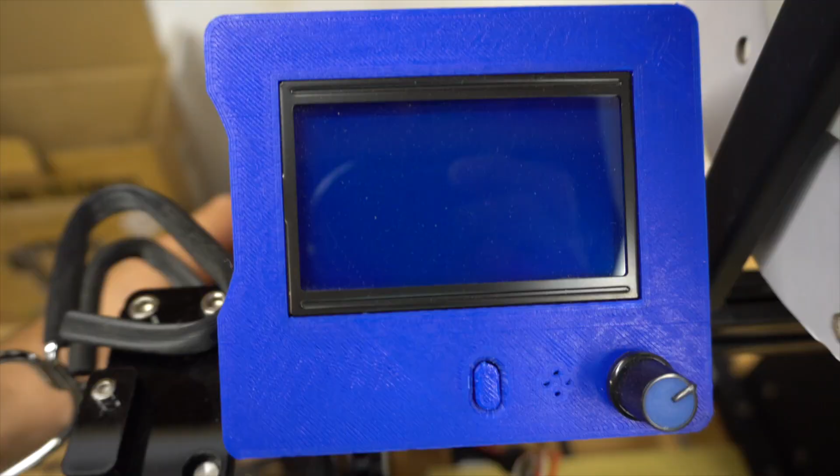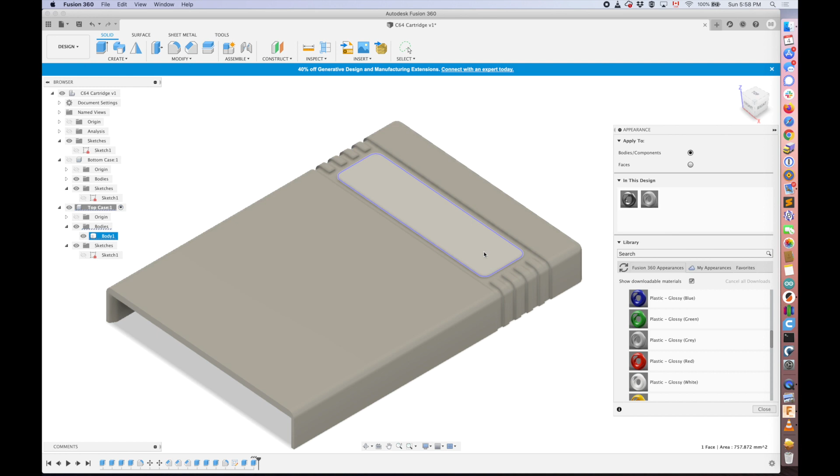Let's change the appearance just for the fun of it. So let's do plastic, glossy, gray. Let's do a gray here, and then a white on the... I think I can select this and then do a white on this, like this, and do the bottom case.

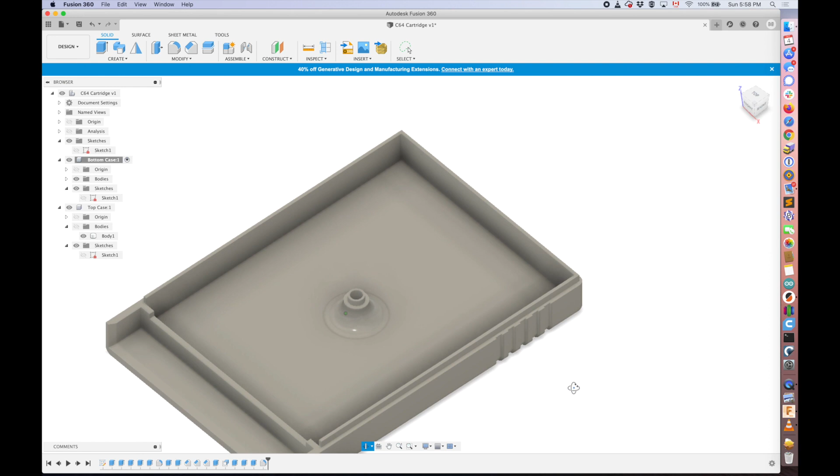Appearance. Select this one. Yeah, okay. Modify appearance or A. Take the same gray, put it in like this. That looks nicer. Let's look at everything. Yeah. Seems to be good.

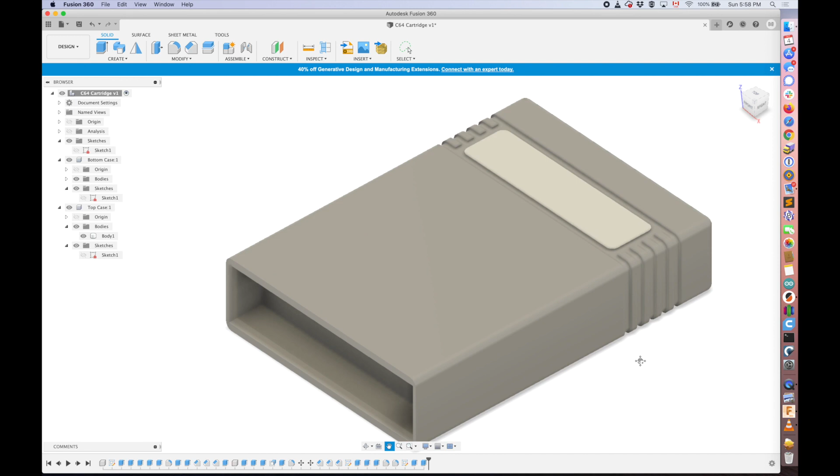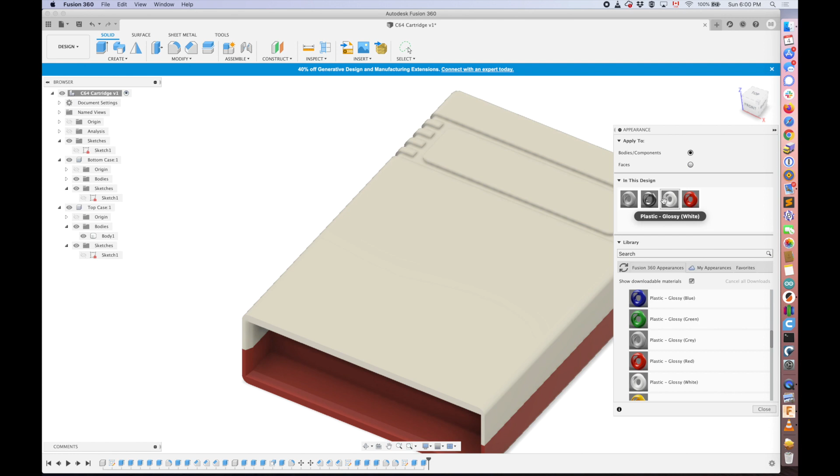Now the last thing to do is to print it, but just for the fun, let's do a 2-color, so appearance, and do say a red bottom and a white top. No, let's do a blue. Red and blue. That's it. Okay. Close.

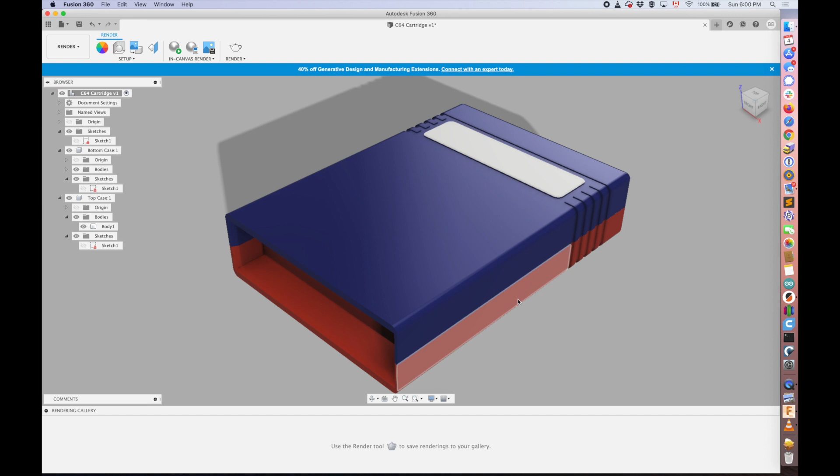Let's do a little render just to... Yeah, that looks nice. Yeah. Pretty satisfied with it. Cool. That's it. Let's save. Let's go back to the design and then save, because if you don't save, you are in trouble. And maybe you want to print this.

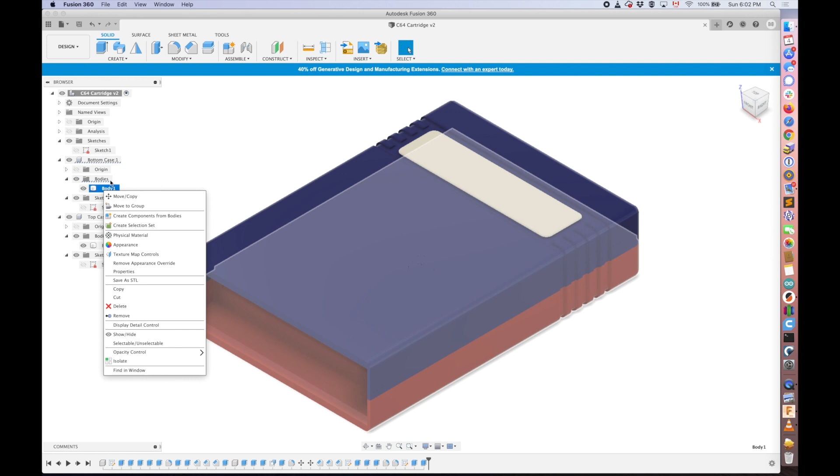So to print it, you just select one of the bodies. Let's say the bottom case body, and you save as STL. I like high and binary, so okay. And let's put it on the desktop. So let's call it C64 bottom case.

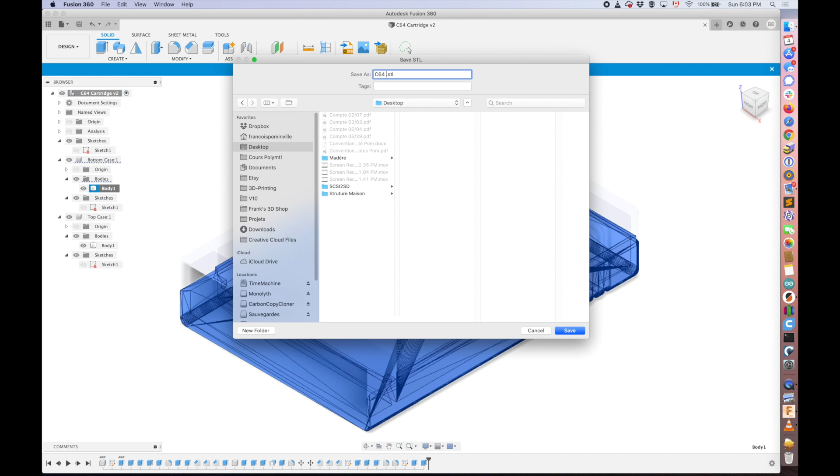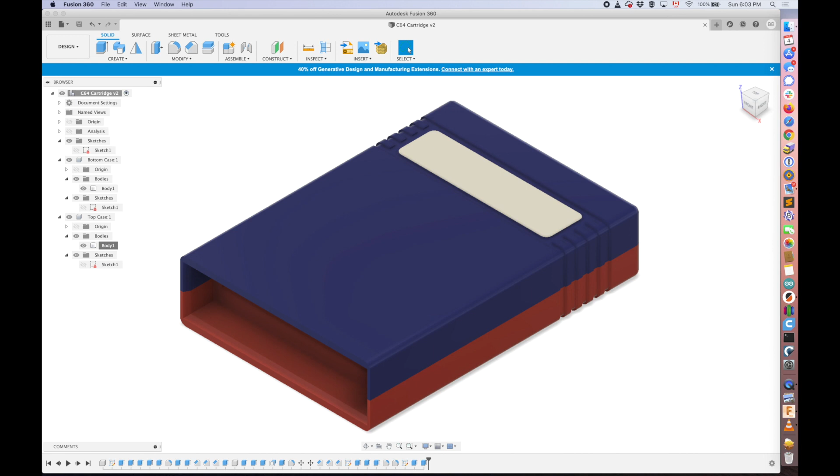Same thing with the top. Save as STL. Same settings. Okay. And let's call it C64 top case. And let's look at, let's say, PrusaSlicer. Let's load it from the desktop. Bottom case. That's it. Nice. And then if I load the top case, it's gonna be upside down.

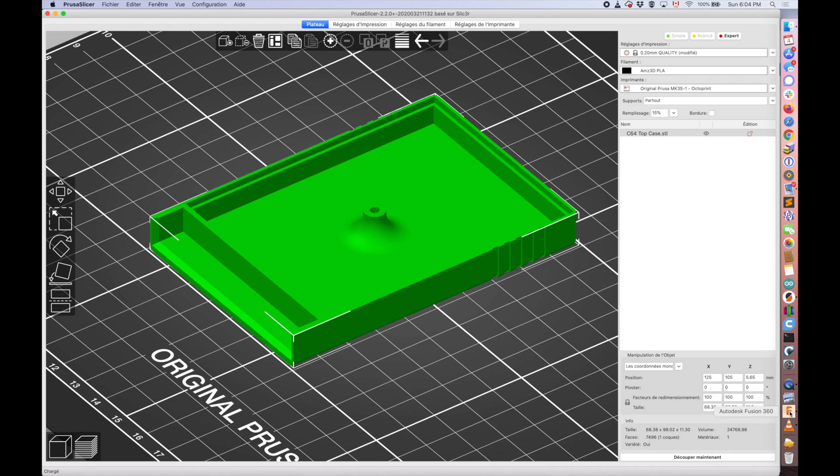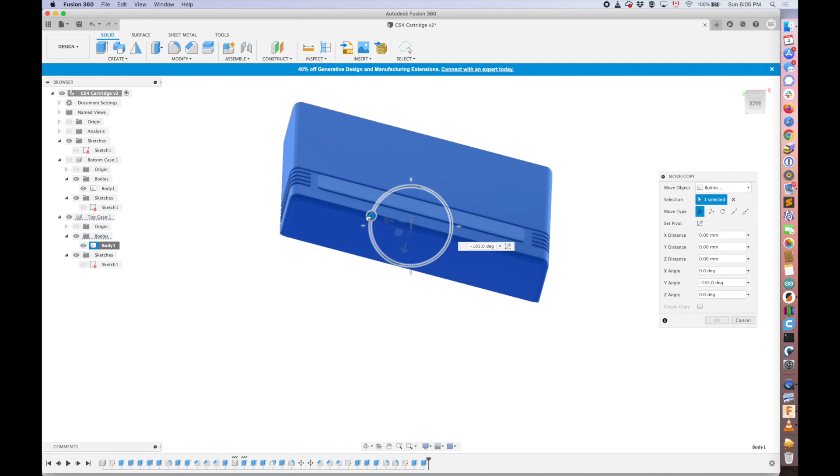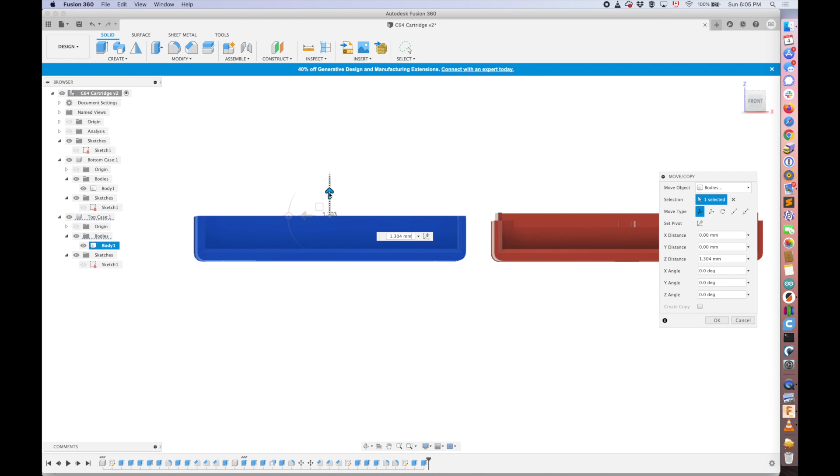So just for the fun of it, let's do something. Let's take the top. Let's move the top. Let's move it from the middle here. So let's flip it. Oh, sorry. Unselect this. Let's flip it. Then let's look at the correct orientation. Then let's move it to the side of the other one, and the same height, which would be I think 1.7, 1.2. That's about it.

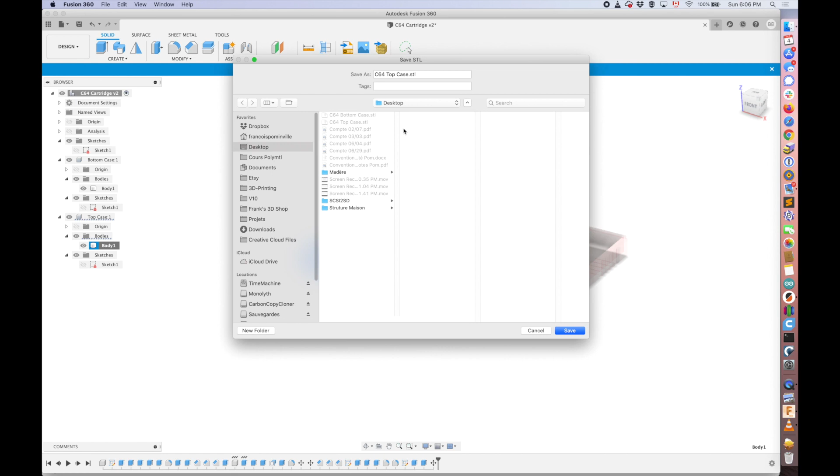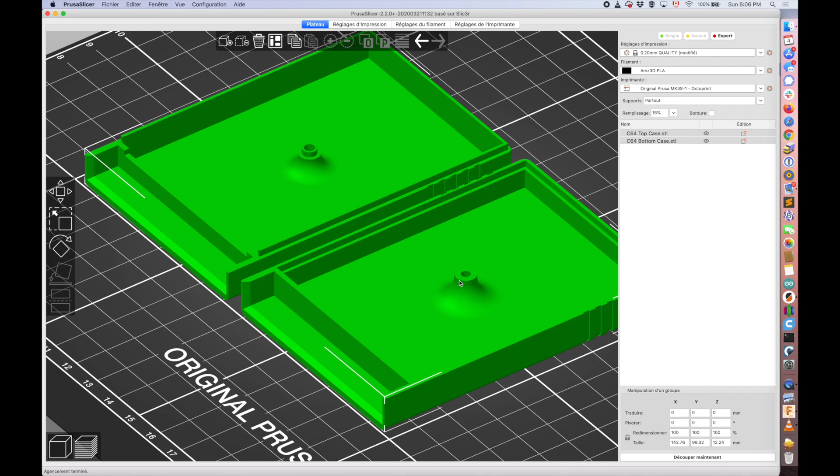So that way, if you do the top case again and save as STL, okay, then same name, replace, and you go into your slicer and you import the top case. It's in the correct orientation, same as the bottom case. So we have the bottom case and the top case. You can print them side by side, right? Like this. They look correct. If we do a slice, there is no error.

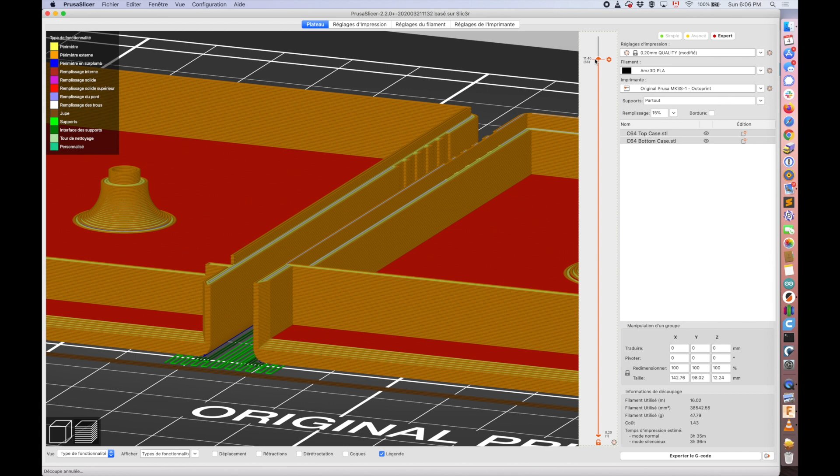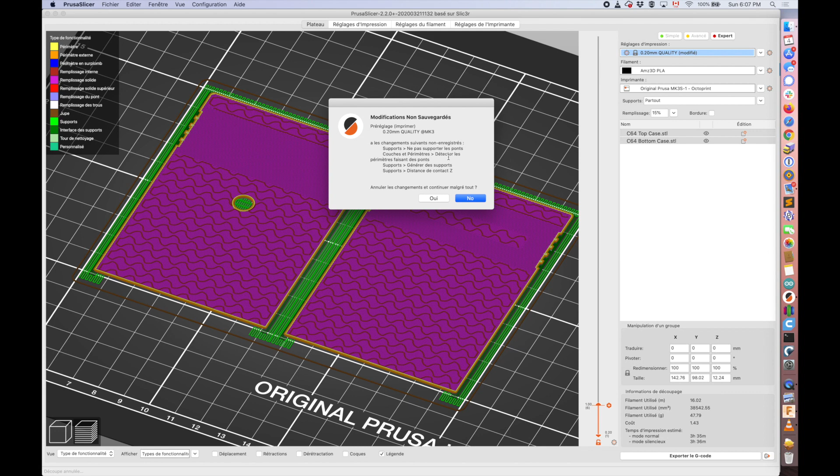And I like to look at the layers mainly like this. Everything is going to print correctly. There is support here. Let's remove the support. Let's load back the preset without the support. So there is no support here, if you see that hole.

But since we made a small 0.1 millimeter layer, oh no, it doesn't do that. Maybe I have to go back to 0.1 millimeter. Let's see. Yeah, because it's 0.1, you have to use a layer height of 0.1 to have it. So you see it here. Yeah, that's okay. But if you do it at 0.2, you lose that. Depends on what height it is.

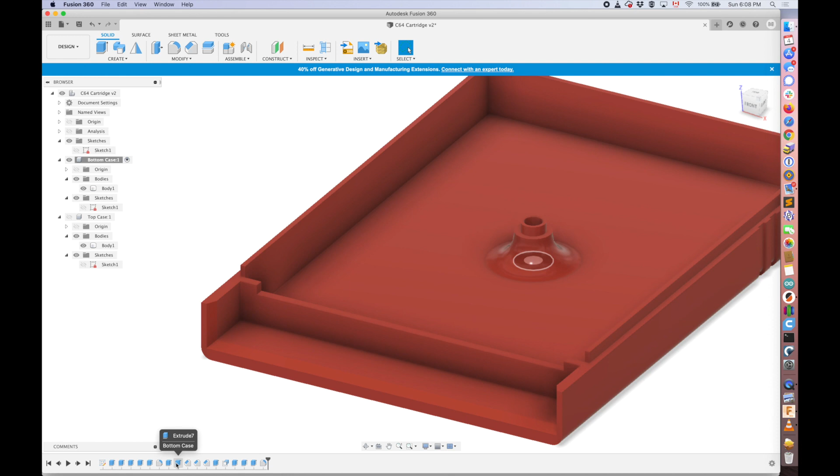But we could go back to, say, the bottom case, then go back where we did that small... I think it's here that we did it. Let's double click, yeah, and make it 0.2. So now we have, let's look at the analysis. We have a 0.2 millimeter sized, let's say, a shelf.

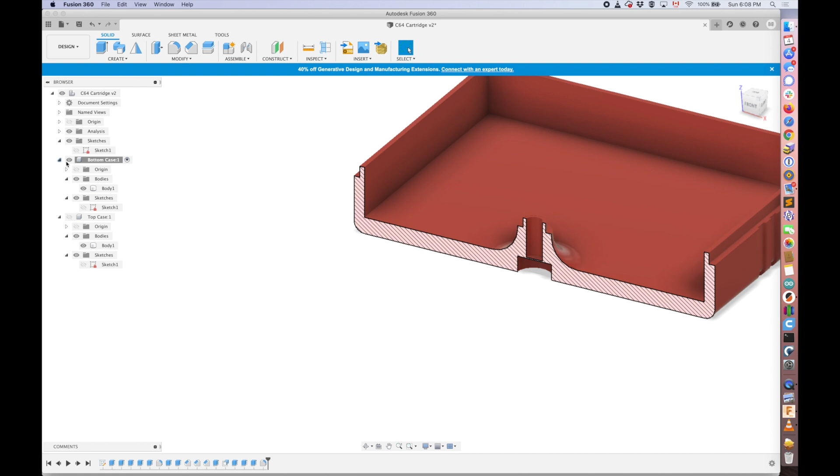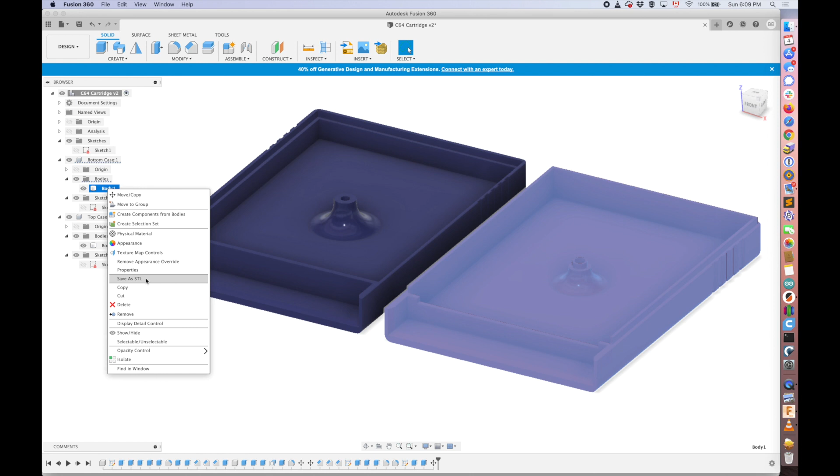Now, if I go back here, then re-export the bottom case. So save as STL. Okay. Bottom case. Save. Replace. And go back here and do a reload. No, it's in French, but anyway. So now we have reloaded that case.

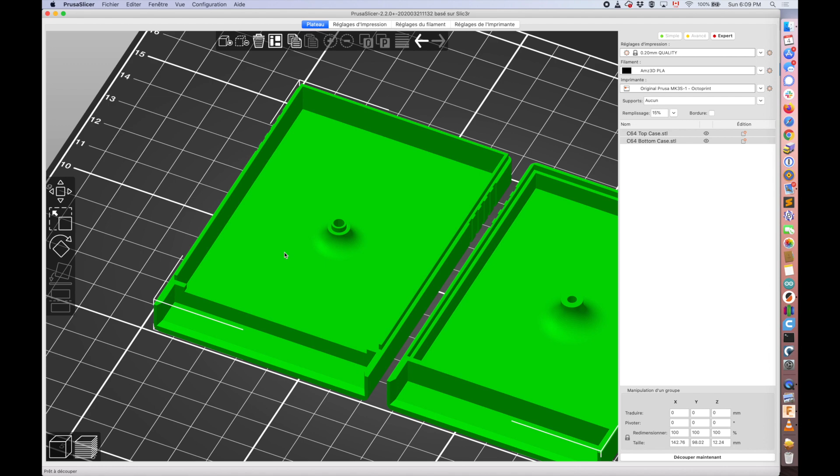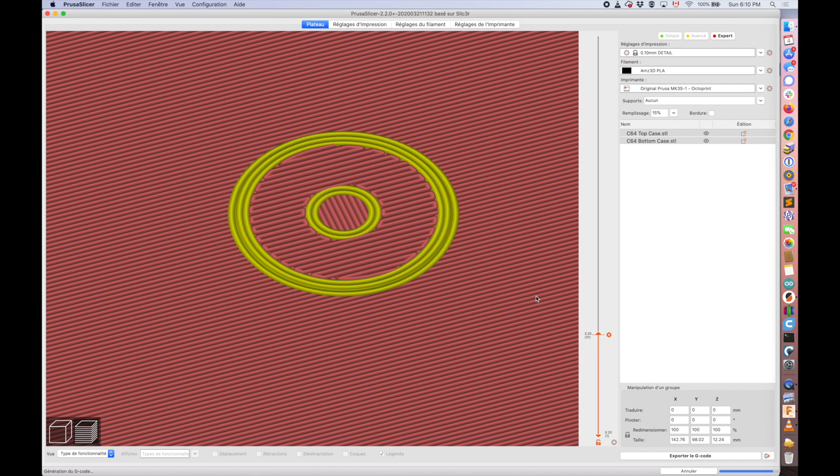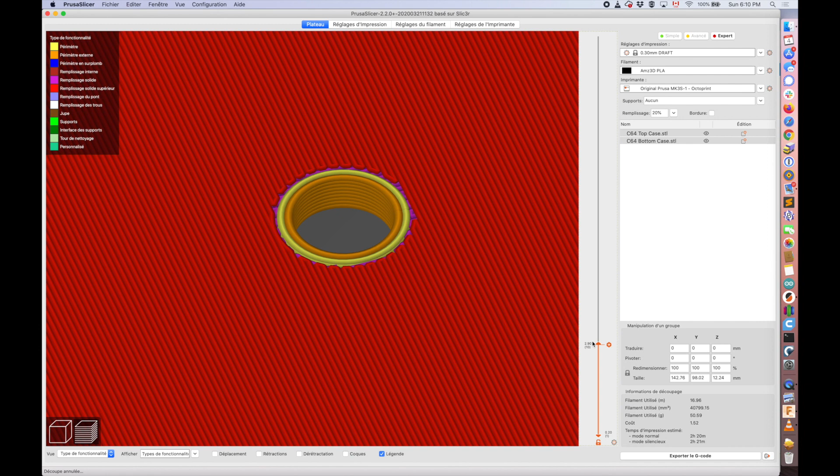If we do it again at 0.2, now we have the closed... yeah, that layer prints at 0.2 because it's 0.2, but it should also print at 0.1. Yes, same thing, just a little lower. And I don't know if it's gonna do it at 0.3, not sure. Let's try. Yeah, but at 0.3, this top one is messed up. So let's look again at 0.2. Is it correct? Will it print okay here? Yeah, it's correct here. So 0.1 or 0.2.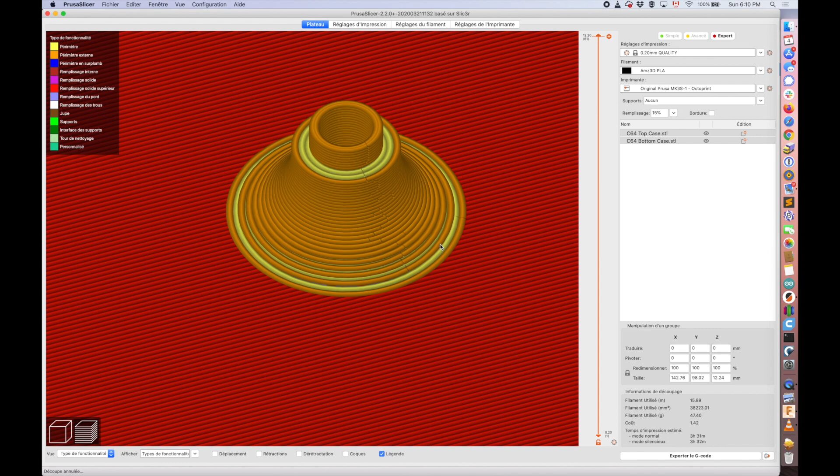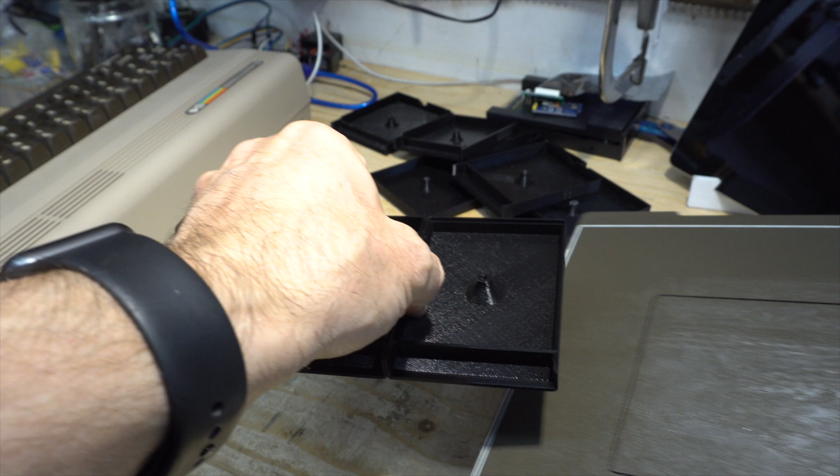Cool. So let's take a look at what we have redesigned. I already did it once in Fusion 360 for this one. This is the one we did together inside. Oh, that is satisfying when it pops like that. So let's see if we made some mistake or if it fits like the other one.

I didn't put the hole, so let's remove this and try it like that. Probably yours will not have a switch, so... oops, I did something wrong in the measurements. What did I do? I think I took the whole thing here, so it's longer by that much. So let's correct this and print it again. And maybe add the hole just to see, but let's see if at least it's closing.

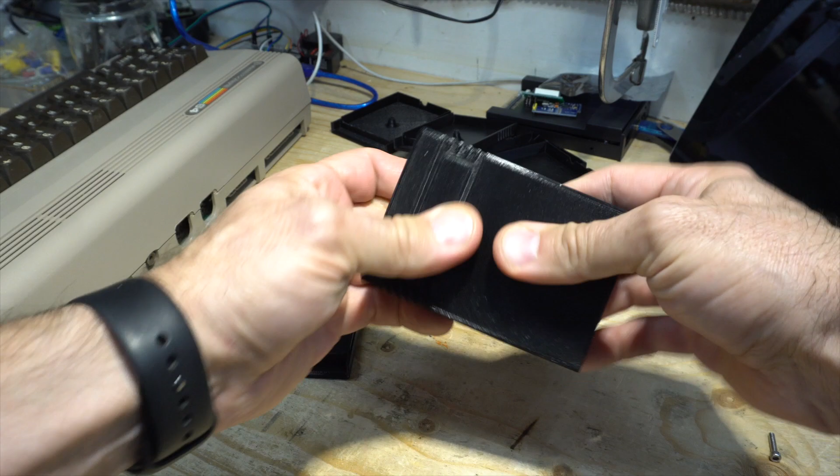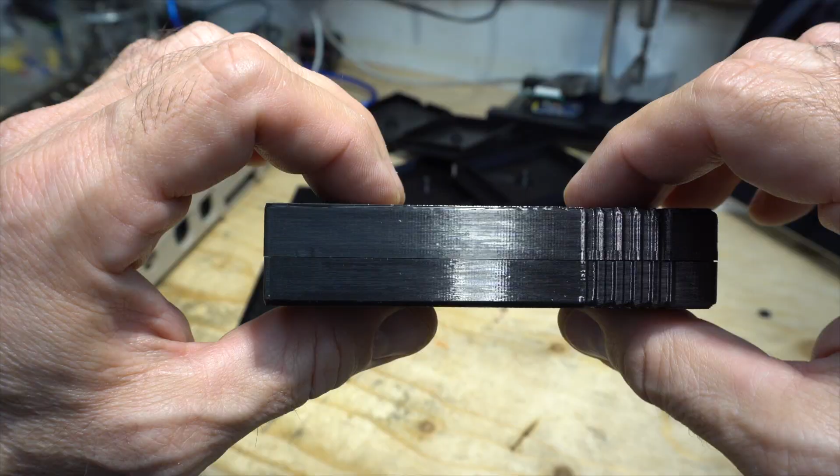Yes, yes it is, but it seems to open up here. So it's a little too high here, I think this is too high for this. It shouldn't touch. Yeah, it's touching. So I'm gonna remove, say, 0.4 from the top here, and we are going to scale down the inside so that it fits, because this is not the correct measurements.

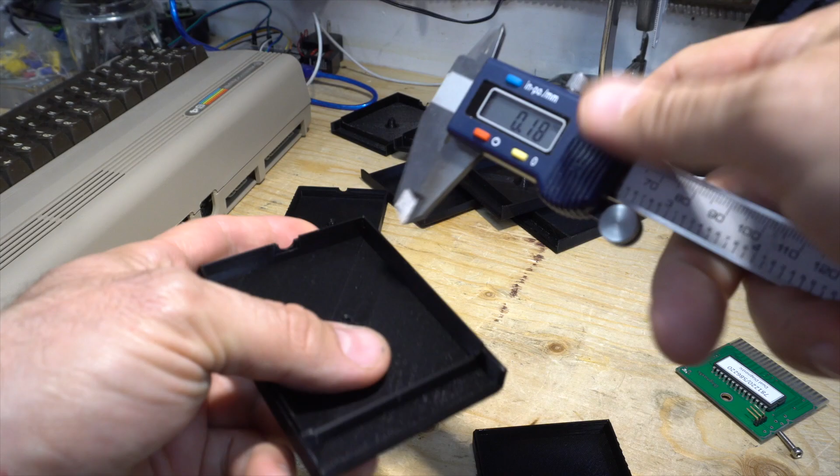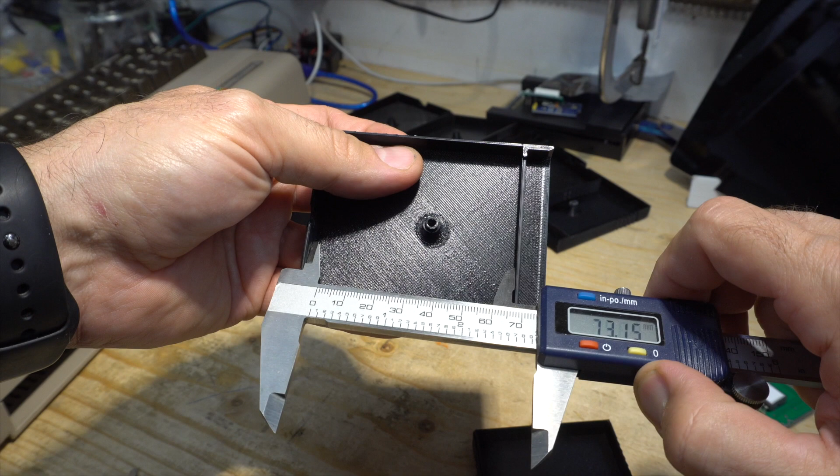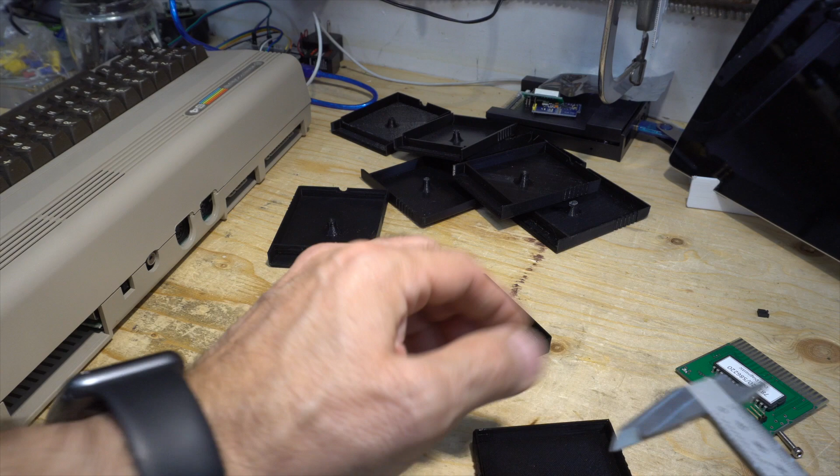It should be, let's see, I'm at 0, and let's see, so 74.74, say 74.74 inside here. So let's go correct this and print again. That's why we print something. It's easier. You just have to modify the problem and try again. So let's go back to the computer.

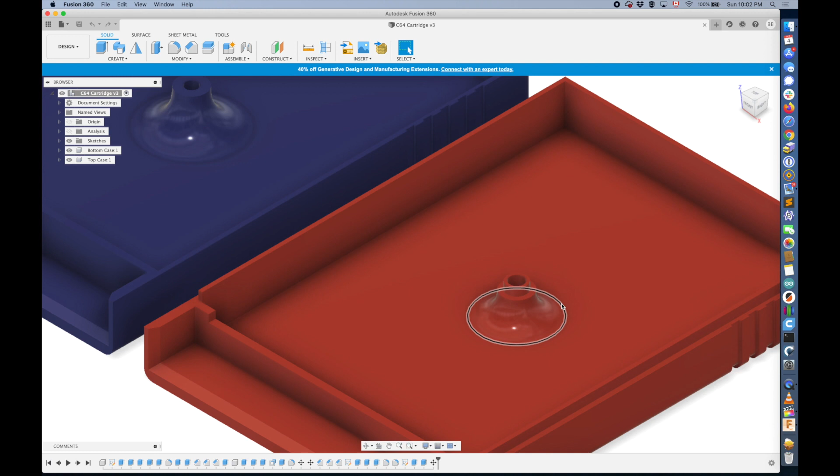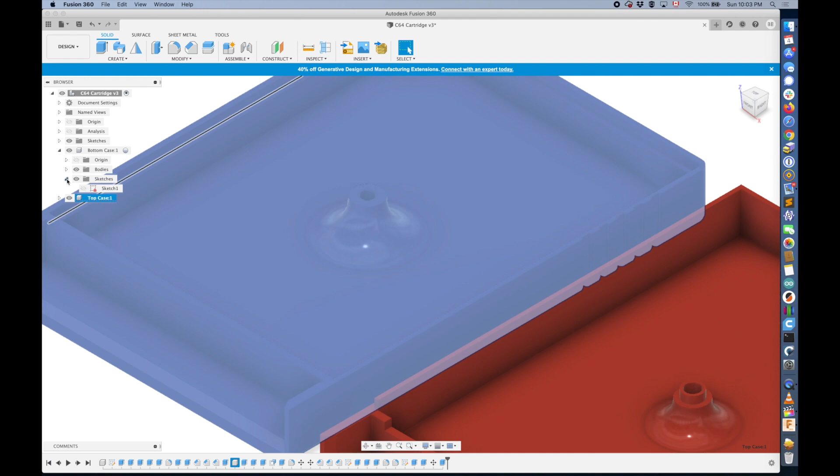Okay, so we are back where we stopped, and let's modify the height of this. To make things easier, let's move this up. Because it's upside down, we move down, say 0.4 millimeter. Okay, then the first sketch, and now if everything was correctly done, we should be able to edit the sketch and keep everything else correct without needing any other modifications. So it was 74, that's 74, or just about.

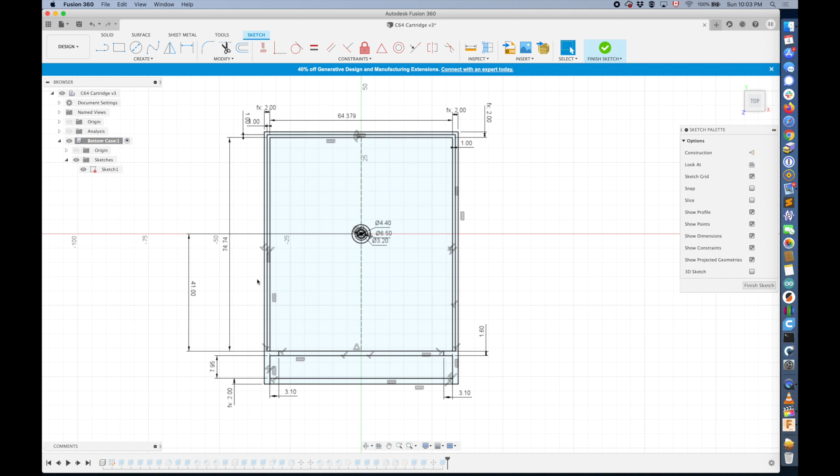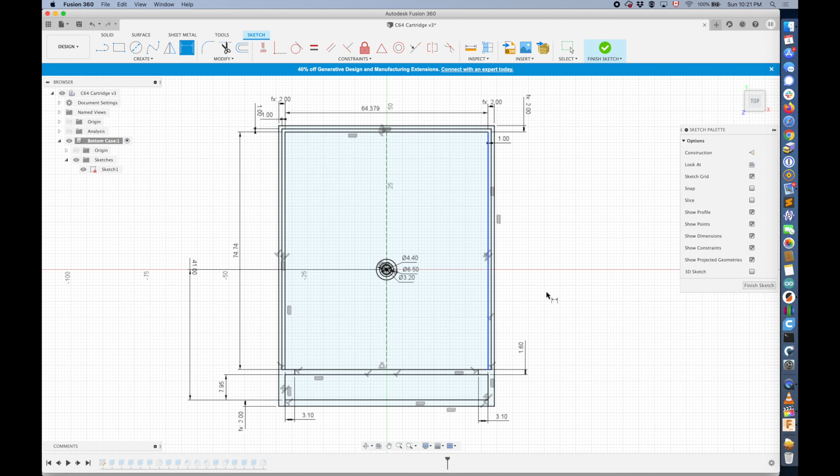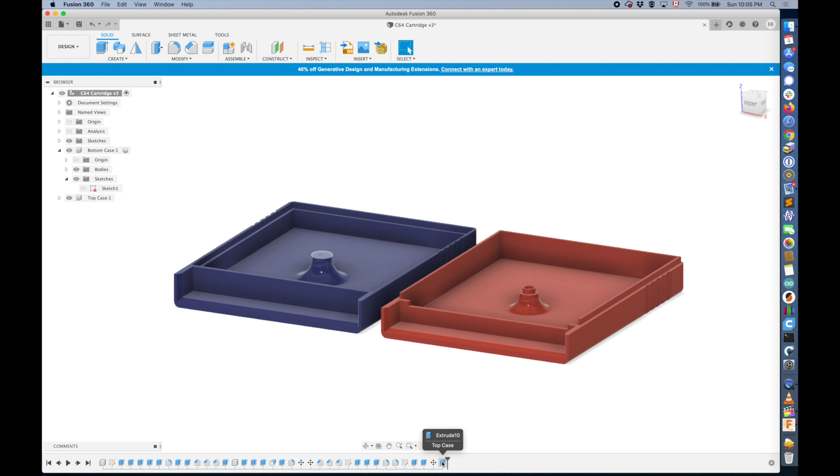But I think that this measurement isn't good either, because it's from here to here. That has to be 41. That's 41 from the hole. So I think that is more like what we need. And you see, everything stayed the same, because everything was dimensioned and constrained, so you don't have to modify anything else. It's just the dimension and the position of the hole, and we have reduced the height of this one too. Yeah, it's here. So let's try this again.

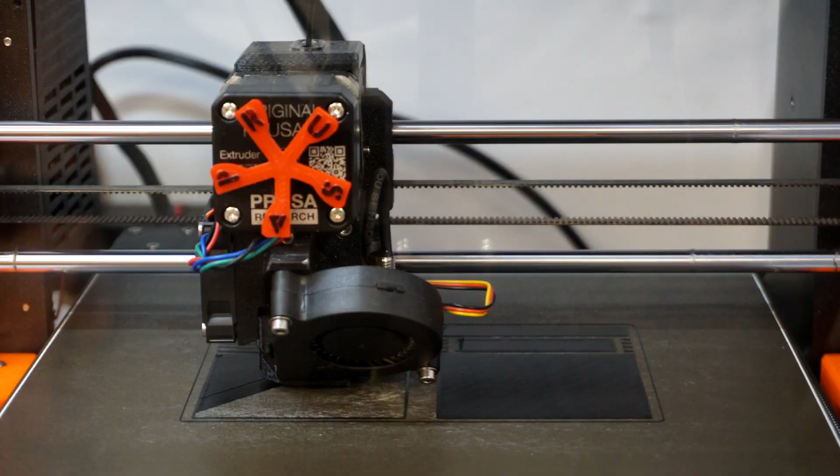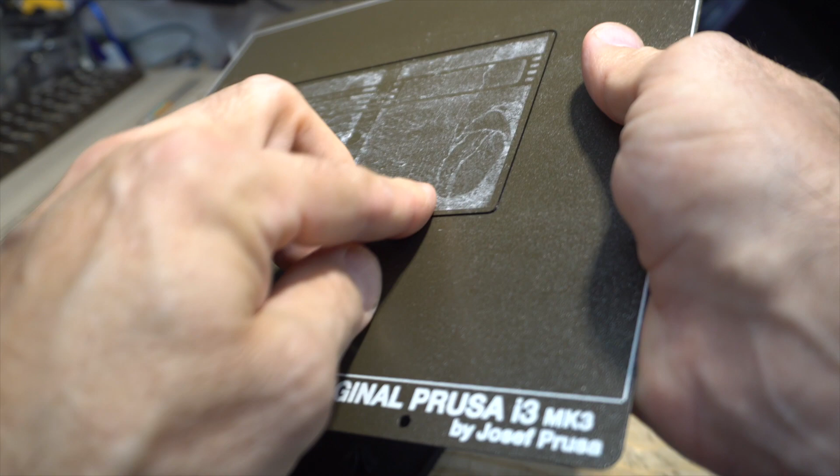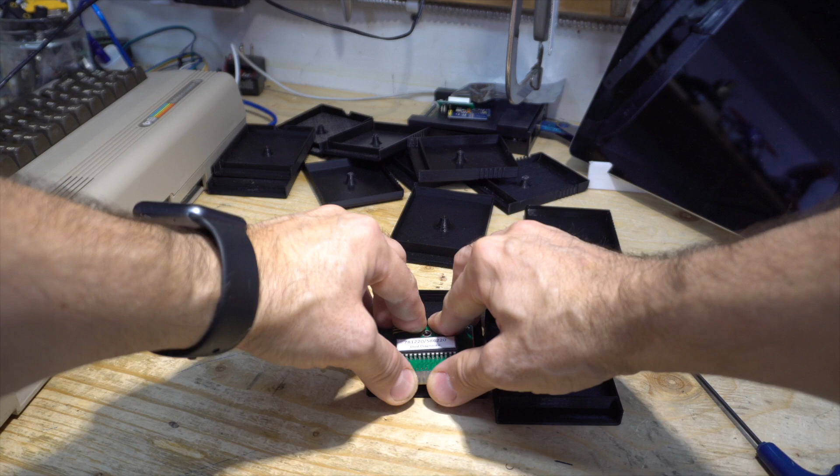So let's send it to the printer. That's it. Okay, those were too big, so let's bring the new ones. Still satisfying. Move this away. Let's see. Yes, we did make changes. Then put the cartridge in. Like that. Still no holes, but we'll do this later. And yeah, fits nicely now.

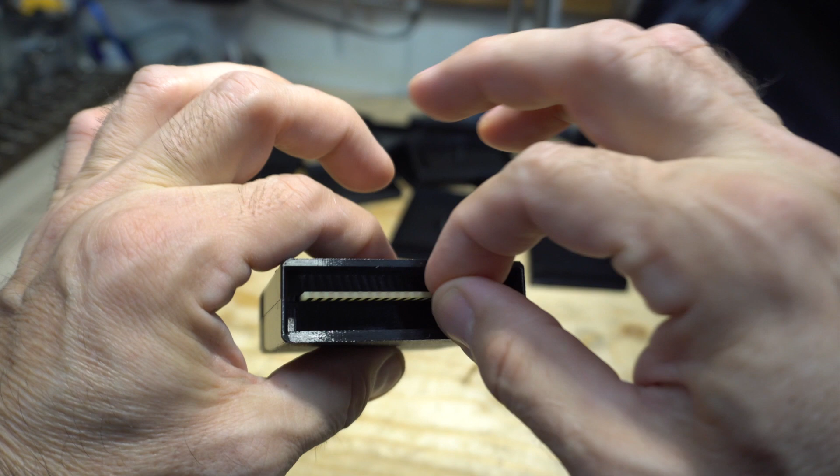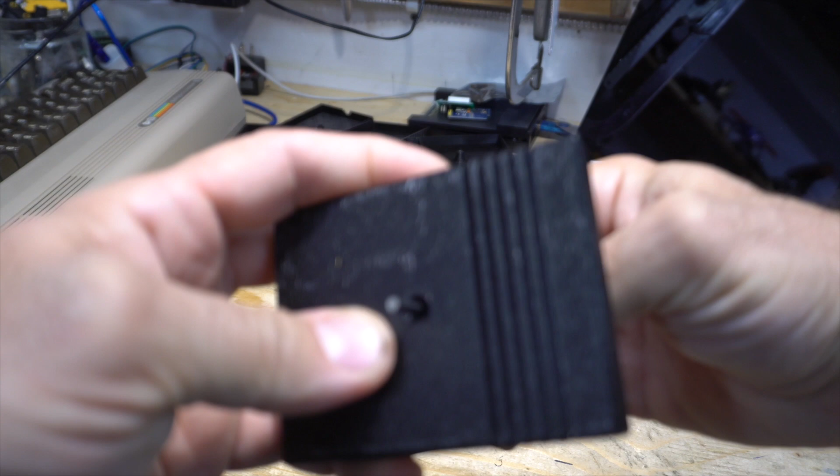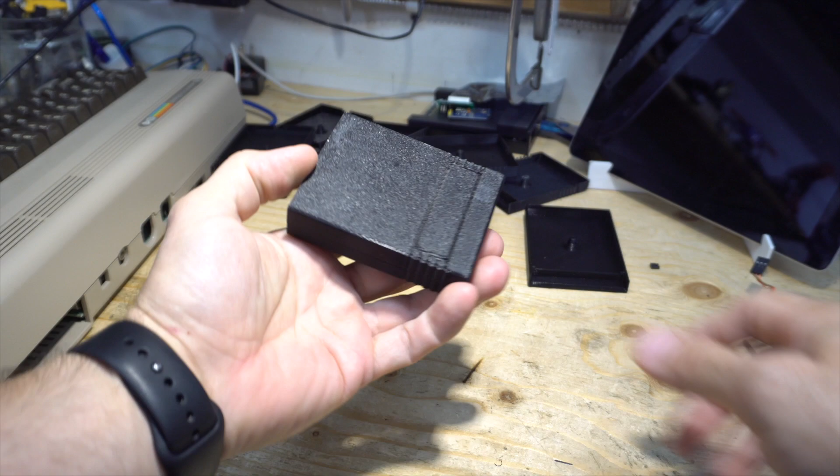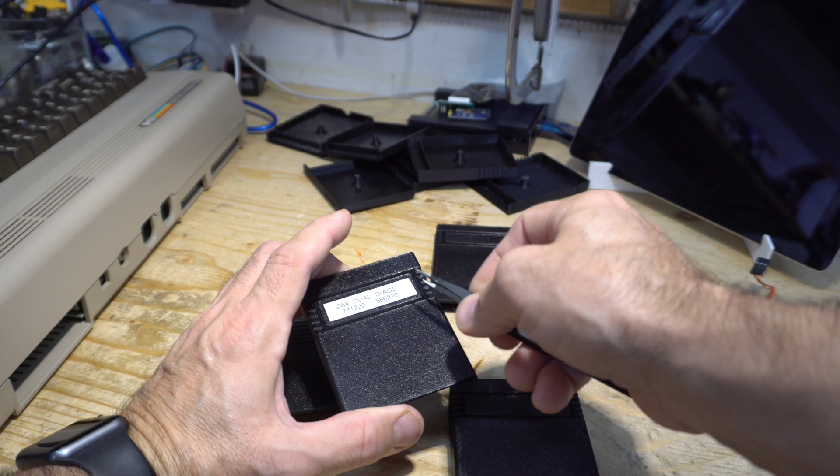There is no gap, and everything is fine. Oh, there is the small bridge. So we pierce a small bridge inside and use it. I think it's a 14mm screw. That's it. Then maybe transfer this sticker to the new one. That's it. And then final test. Yeah, works great.

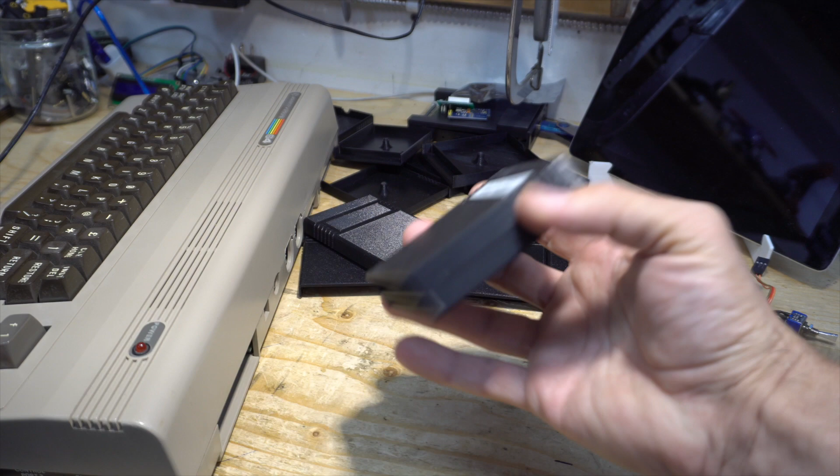So the design works. We did correct some errors. That is what is great for rapid prototyping, because you can easily print something and a couple hours later make changes, print it again until it's just right the way you want it. And this is perfect, except for the hole. I'm gonna add the hole. Cool.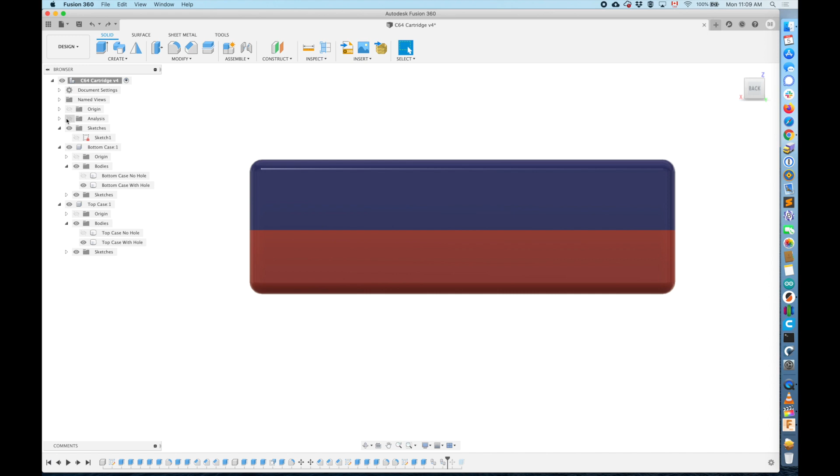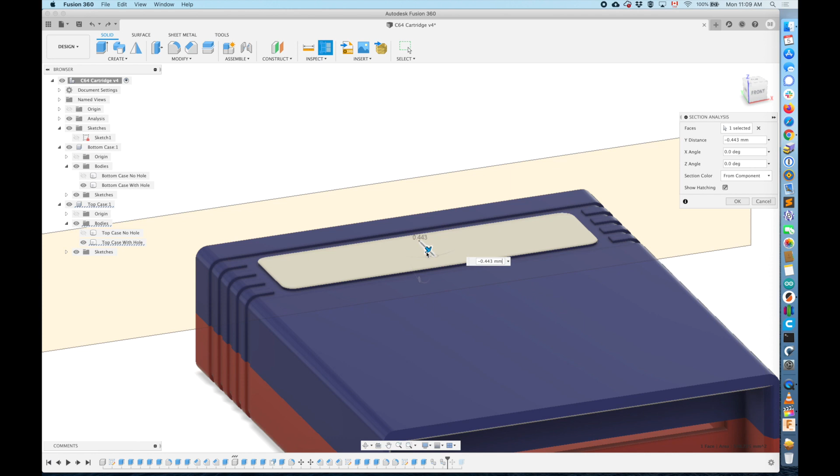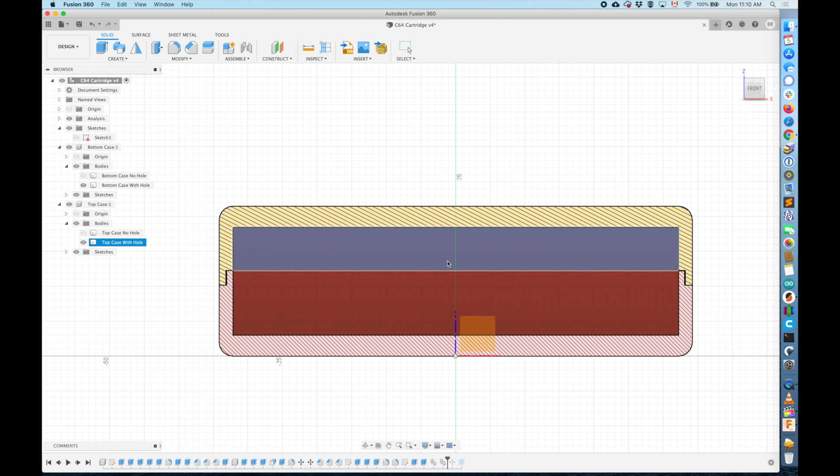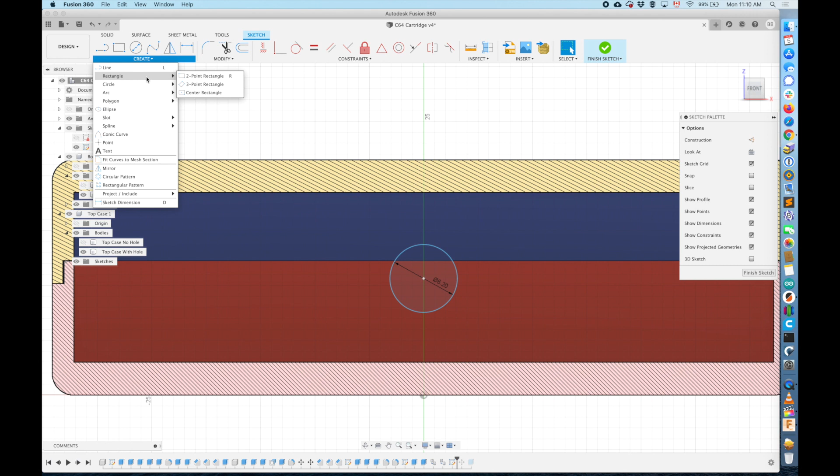Okay, so let's do a section analysis so that we can see inside, but just the other way, like this, so that I can do a sketch from the inside. And now let's create a new sketch on this plane. Let's place it about in the middle. It's not that important. So 6.3mm. And my switch has a square that I can use so that it doesn't move when we screw in the switch. So I'm gonna create a center rectangle, so it's centered here. So 6.2 by 7.3. No, 9.3.

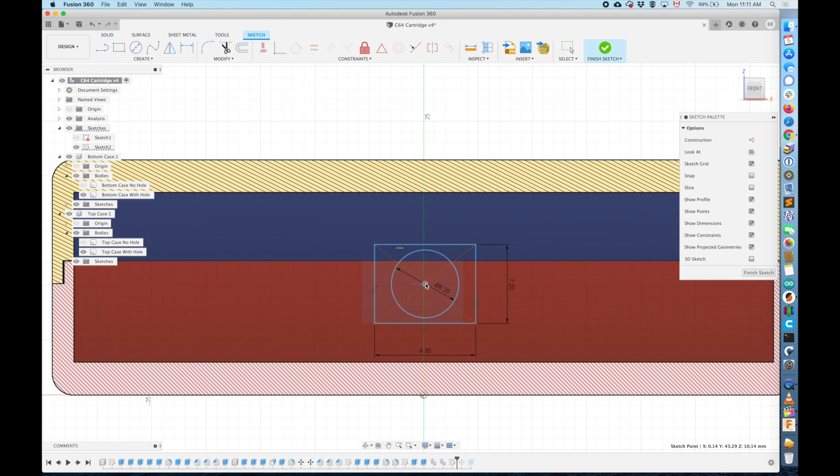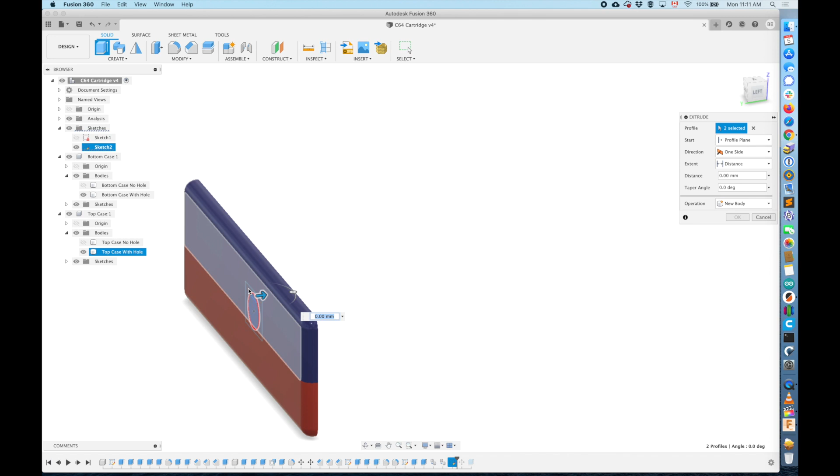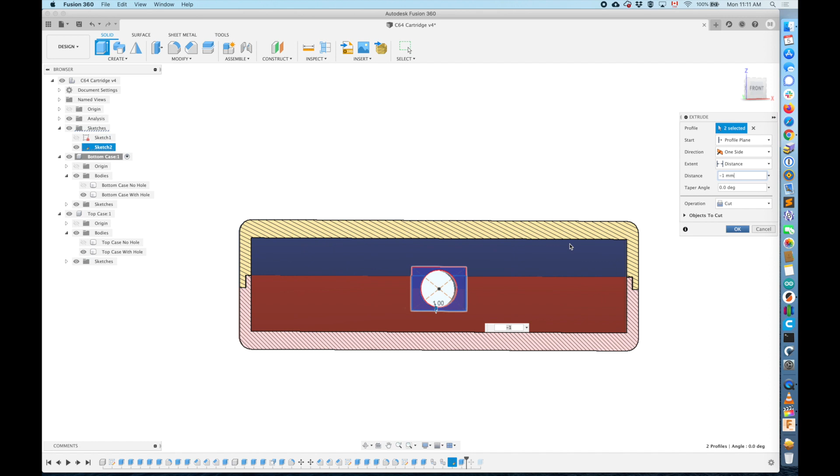7.2 by 9.3. Yep. Okay. Center this. That's what I want. So a hole for the switch and a recess also for the switch. Let's extrude the hole, this and this to the outside. This seems correct. Then extrude the notch by -1. Turn off this and see. Yeah, that's what I want, because when I screw in my switch, part of it will hold in this square so it doesn't move when you screw it in.

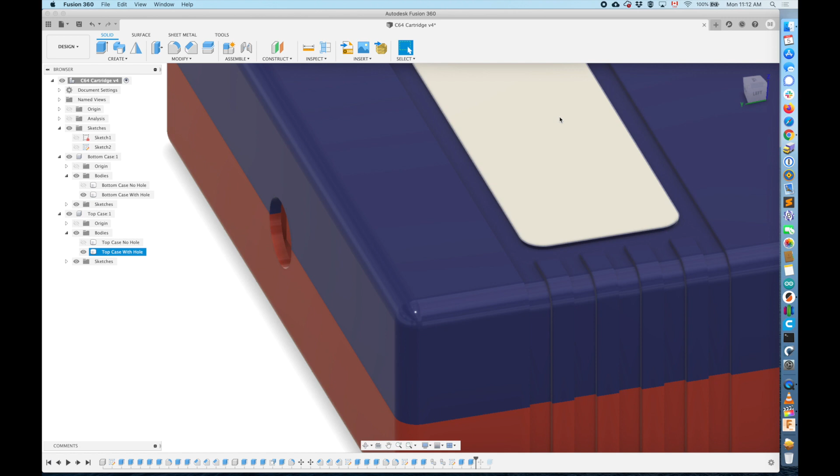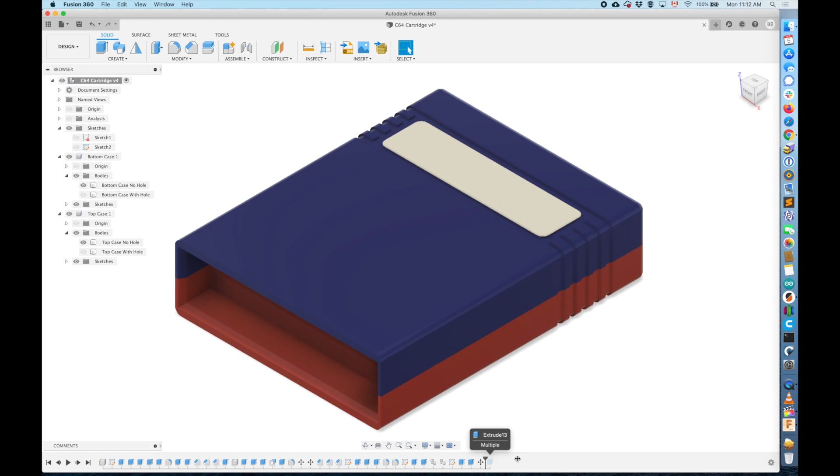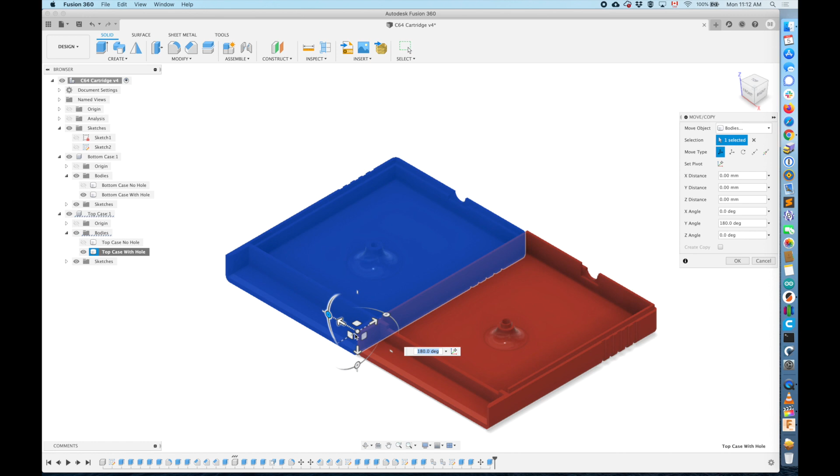So again, same thing. Now that we have our hole, we'll print this again. So save. So we have both versions now, and we can go back to the hole version, then bring the history back there. So we have the version that doesn't have a hole, and the other version, which are on top of each other. We can do the same thing and move the top of the case the other way, like we did before. Then this version we can also print, same way I did before.

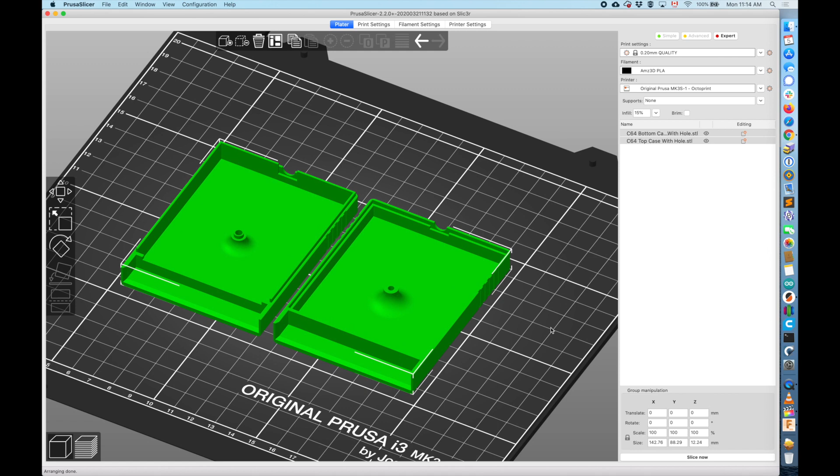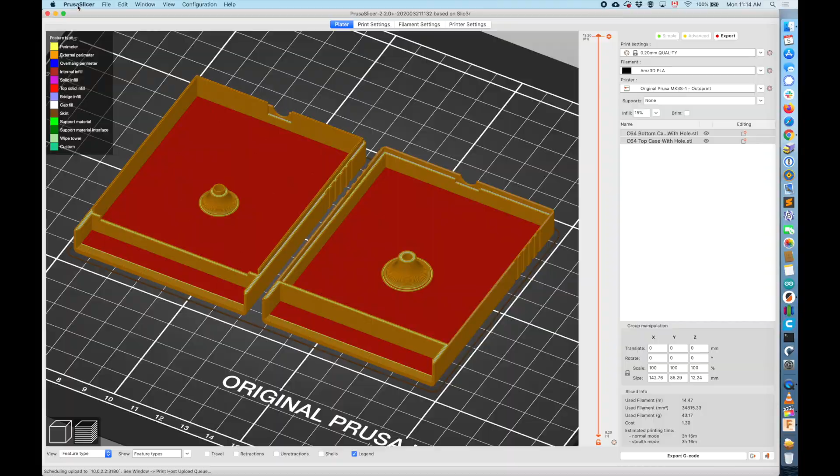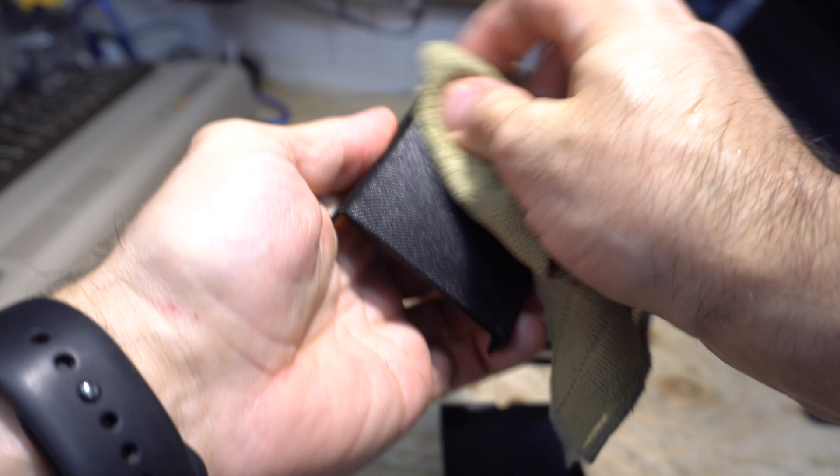Slice it. Everything seems to be good. Yes, we still have our bridge. The hole is there with the recess. So let's send this to the printer and let's look at it in 3 hours and 15 minutes. Okay, one last time. There you go. Whoops. Okay, so just clean up this so that there is no glue. Now we have the notch and the small recess.

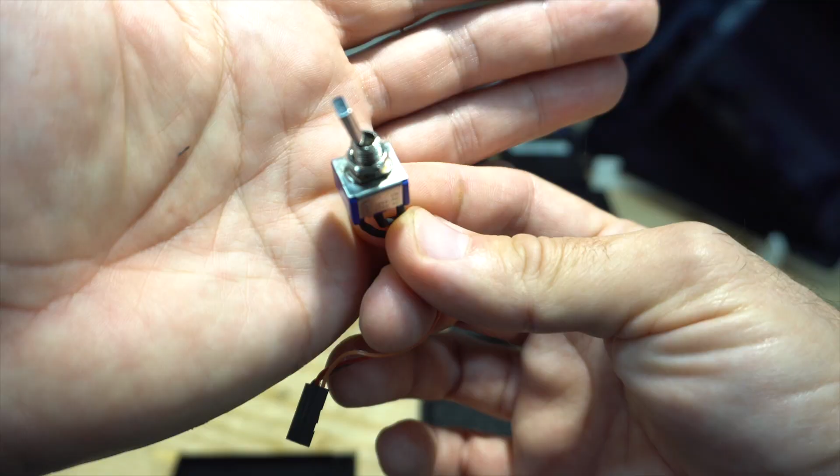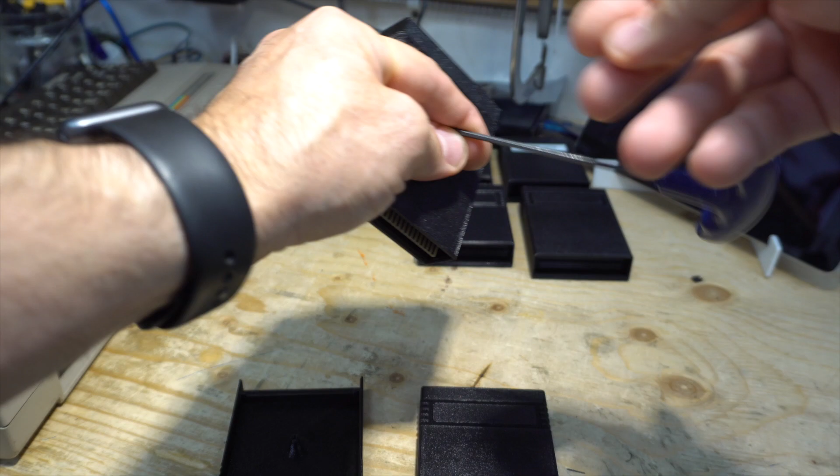This is the switch. Okay, so let's... sticker. And okay, push this, make the hole, then place the cartridge. Okay, fix this. It's not gonna move much. So let's test it. Yes. So now it's complete and we have two models, one with the hole and the other without. That will be on Thingiverse. Cool.